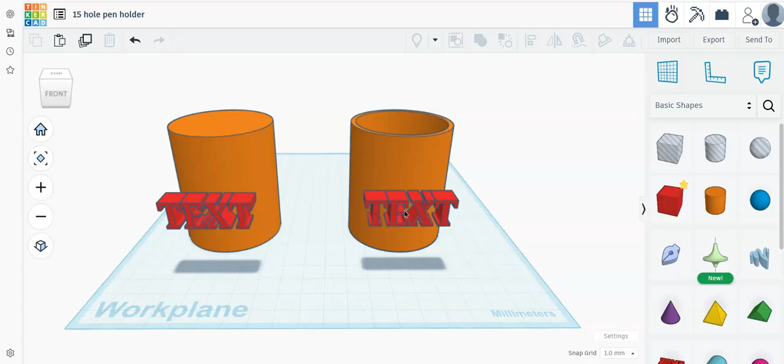In this video, I will show how to create curved text around curved objects like a hollow cylinder and a solid cylinder in preparation for 3D printing in two colors.

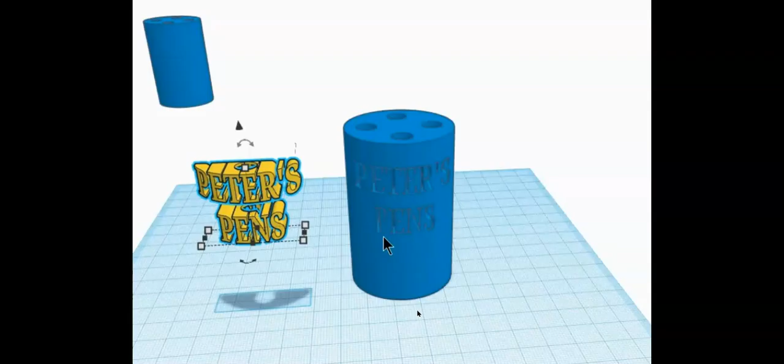In a previous video I made a couple of years ago, I showed how to make the curved letters, and that the cylinder itself had to have a hole that the letters would fit perfectly into. That all worked okay, but I've just discovered that making holes into the cylinder isn't really necessary, and this video shows how to do basically the same thing without that step. The technique for getting the text to curve around the surface of the cylinders is basically the same, but there's one case where you have to be careful of the difference between the two, which I'll get to.

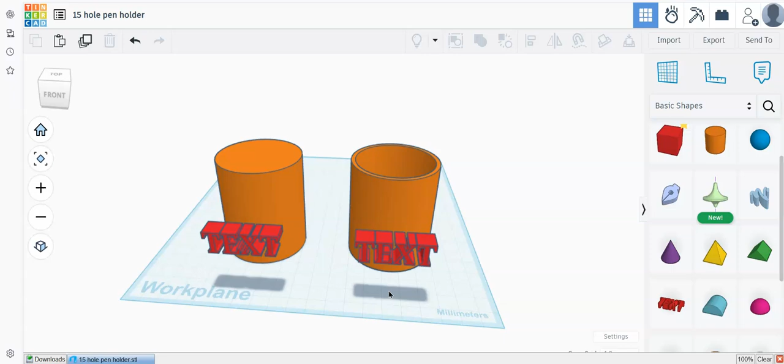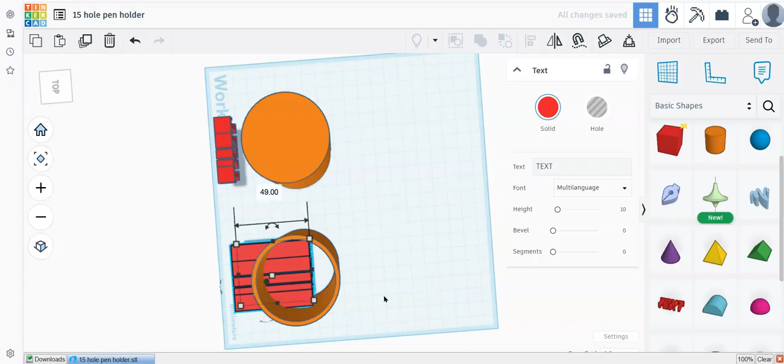Let's start with this one first. So let's bring the text here a little closer, and then grab this black handle and extend this into the cylinder. If we look from the top, it doesn't matter how far we go into it, just make sure the edge letters are within the wall. When the cutting process occurs, whether it's this far or this far doesn't matter, because it'll end up being the thickness of the wall.

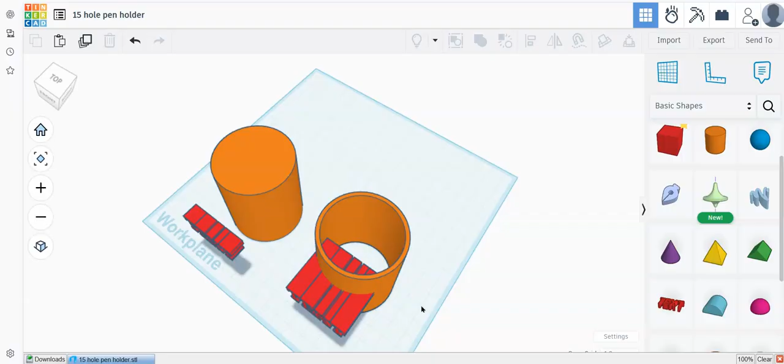So let's go through the technique here. First, before we forget, always duplicate this cylinder and use the right arrow key to go to the right, and use the arrow keys to make sure there's always an alignment. Having everything perfectly aligned is important, as we'll see later when we work in the slicer.

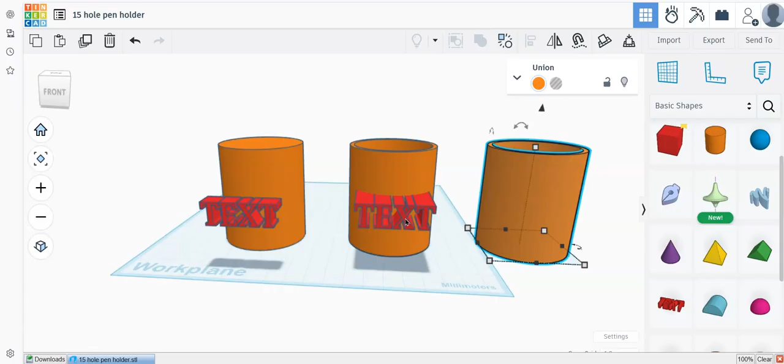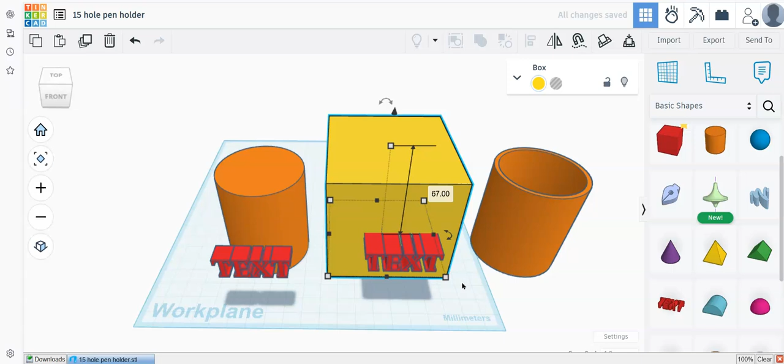So, coming back here, we're now going to bring out a box. I'll change it to yellow just for a contrasting color, and we're going to cover everything, just about, and raise this to cover everything, and the letters should protrude. It doesn't matter how much they protrude, as long as they come out a little bit.

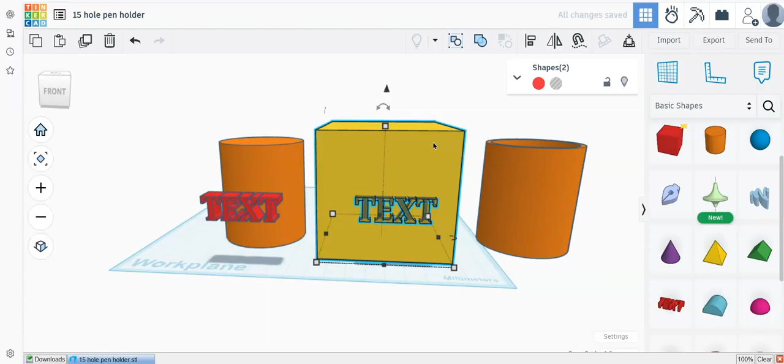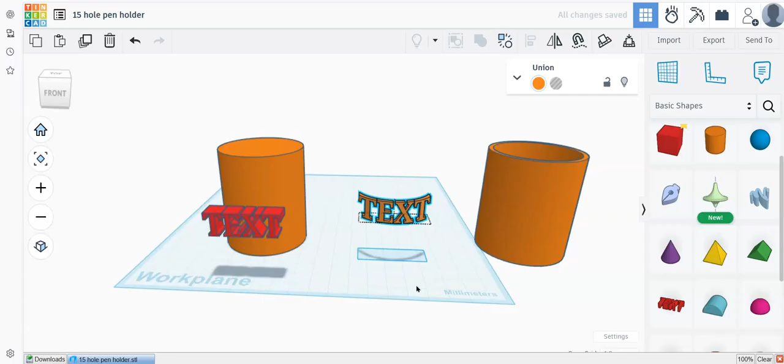So the first step is to click on the text and turn it into a hole. Holding the shift key down, click on the yellow box. We have two shapes now which we will combine. While they're still selected, turn everything into a hole, and now you can just grab these two shapes and combine them, and that will give us our curved letter. You can see now they are just the thickness of the cylinder.

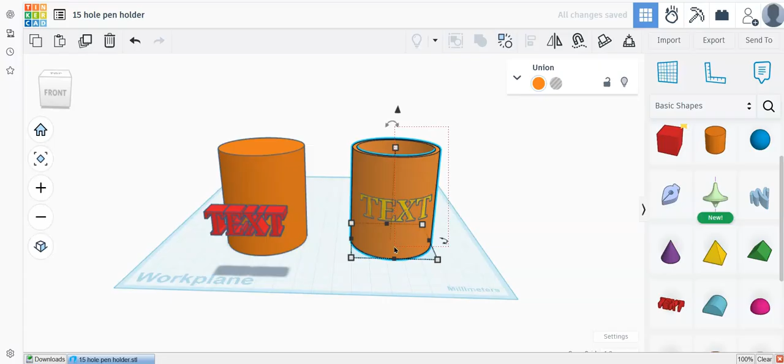So let's change the color here, say to yellow, and bring the cylinder over using the left arrow key, and align them. You can align them just like this by eye, or grab the two of them and use the align symbol here. You can see the grayed out means they're already aligned. So that's fine. Now we have two items here which will be exported and then eventually get into the slicer.

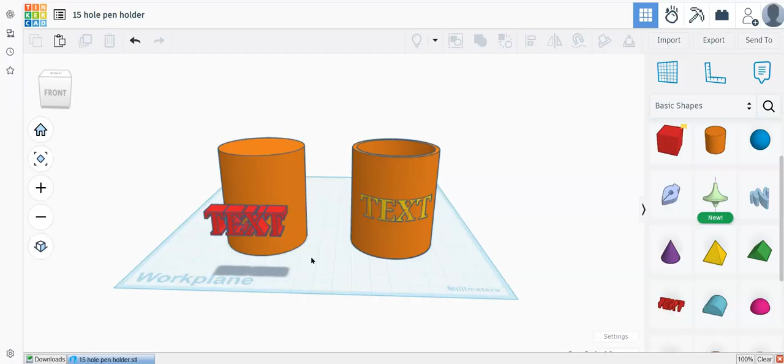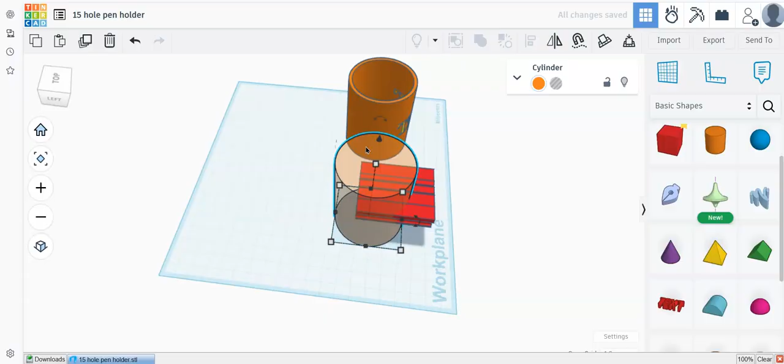I'll do that in a minute. Coming now to the solid cylinder, we'll do the same thing here. Bring this closer and then extend the text in here. Now, if we click on the cylinder and press T for transparent, we can see how far we're going in.

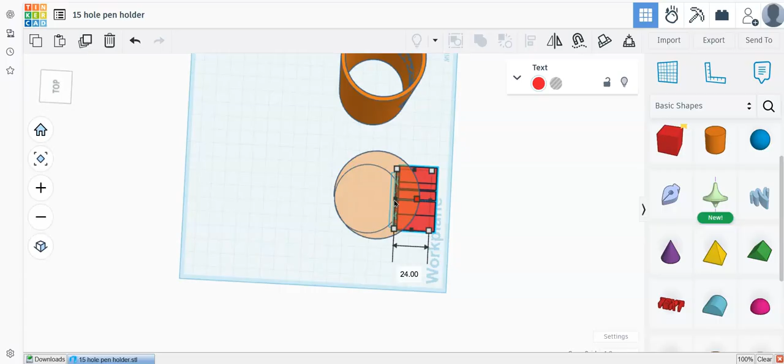In this case, it does make a difference how far we go in. Let me click on here, because if we go in far, the letters will be this thick. That will require a lot of filament and time to be printed, which we don't need. So we're going to withdraw this to the edge of the cylinder here. Make sure we don't go too far back, but we must be sure we clear at this end and this end, and this will minimize the thickness of the letters.

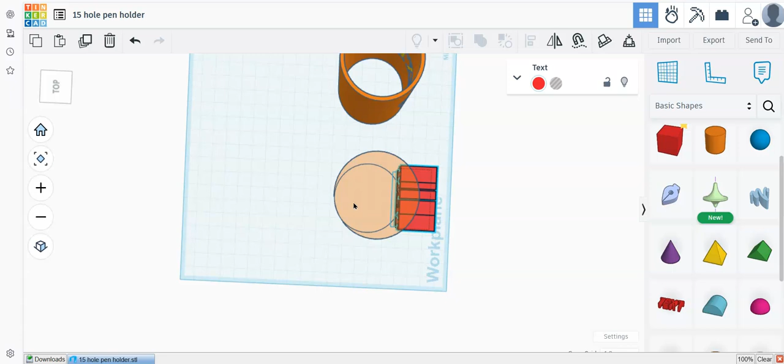Okay, so if we go back to T for transparency, now we'll do the same thing, and I'll do this quickly. You can see now the letters are thicker than they were in this case.

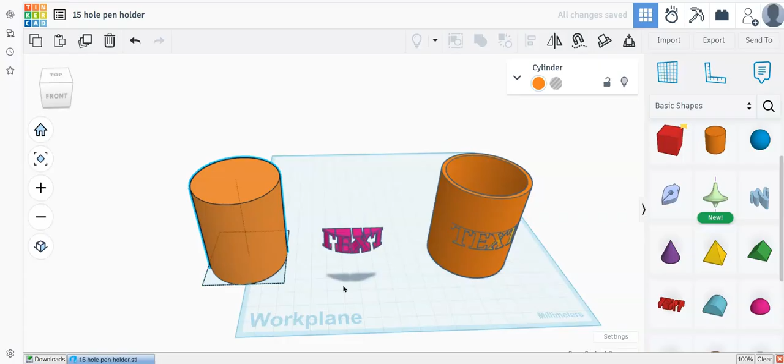Let's get a different color here, and now bring this over. Oh, actually notice I didn't go deep enough because the T is cut off. So this really has to be redone. I have to go further into the solid to make sure I got all the letters. So now we've got the full text shown here.

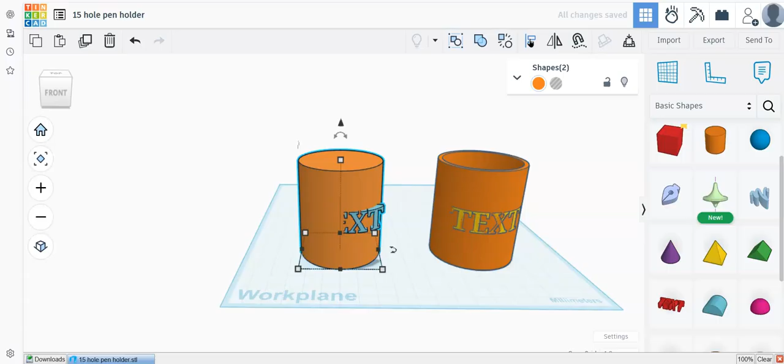Get them both, you can do it this way and click on Align. This is already done, okay, so that's it.

Transparent, and look at this. We can see that the letters go in this deep, and the printing will go into this deep, whereas over here it will just be flush on the inside of the wall.

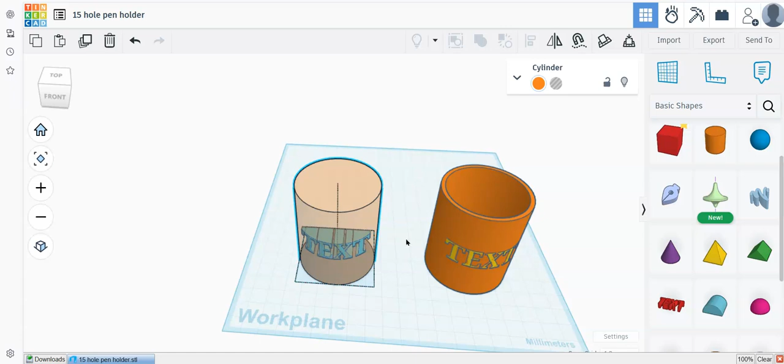Now we're ready for exporting. I'll just do it with the hollow cylinder, everything applies as well to the solid one. So click on Text, go to Export, and see the selected shape, which selected that one shape.

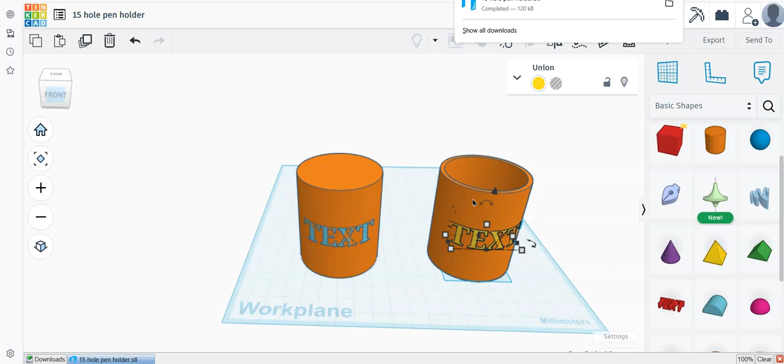This will be saved then either on your desktop or flash drive or wherever you like, and named appropriately, say text. Then click on the cylinder, export again, the selected shape, and that's done. And now we'll go into the slicer.

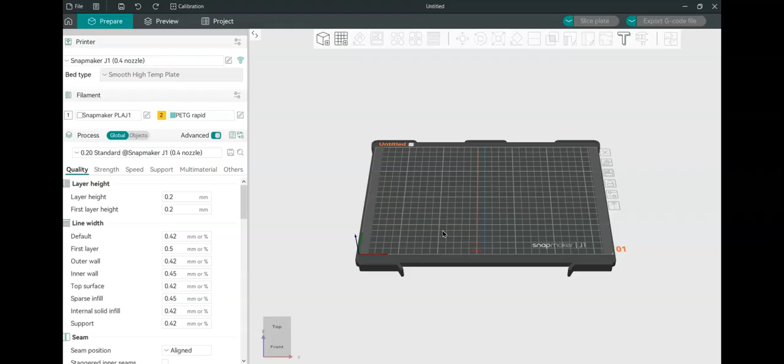Now I've opened my slicer. This is the Snapmaker Orca, and this will be the same procedure as with Orca Slicer and Prusa Slicer. So I will add first the hollow cylinder right here, and now right click on here and go to Add Part. Again, this works with just Orca and Prusa Slicer.

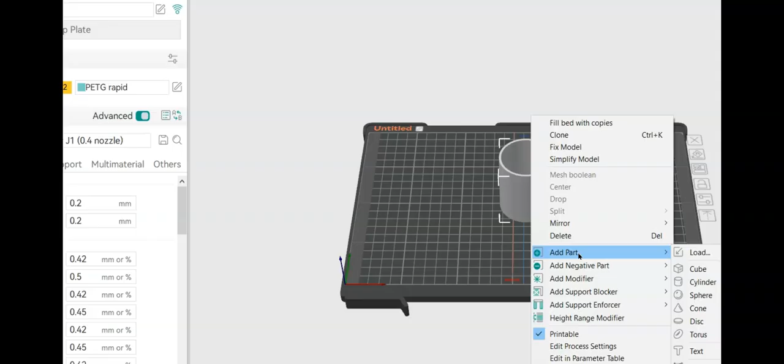Go to Load, and now we're going to look for the text. In order to see this, go to Objects, here's text, click on it twice.

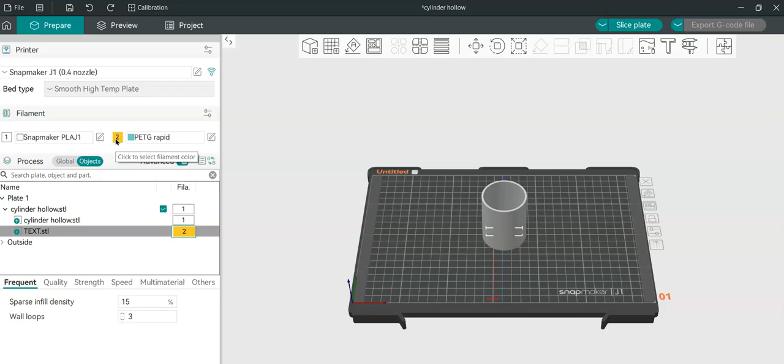This is the yellow, this is the second extruder, and it is perfectly aligned here because it was aligned correctly in Tinkercad. You'll recall I said to use the arrow keys left and right to keep everything in alignment, and it was for this reason, so that it lines up perfectly in the slicer.

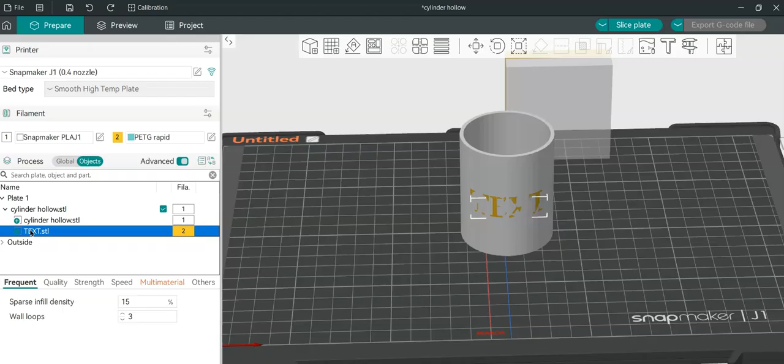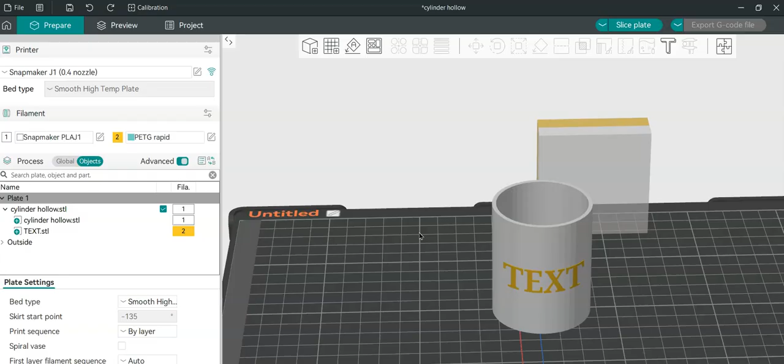If you want, you can click here on text, and if we look at it from the side, we can go up here and move it slightly. If you want it to jut out slightly, we can do it like that. So now it's ready for printing with any printer that has two extruders.

As an afterthought, let me show how this can be applied to making an ornament like this. I'll unhide these objects. So here is a snowflake - there are a couple of good videos on YouTube that show how you can make your own.

And this sphere, if I press T, you can see it's been 4 millimeters thick, the walls, and the rest is hollow.

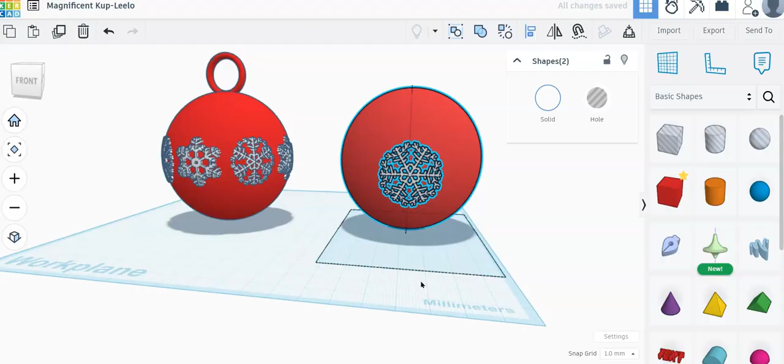So we take the snowflake, let's raise it up approximately, and select the sphere, align them in the middle here. And now, bring it a little bit, take the snowflake, and I'm going to make it around 10, make it thick by 10 millimeters or so.

And then bring it into it a little bit. We can extend it because it's hollow. Remember, it doesn't matter how far we go in as long as the edges go inside those walls.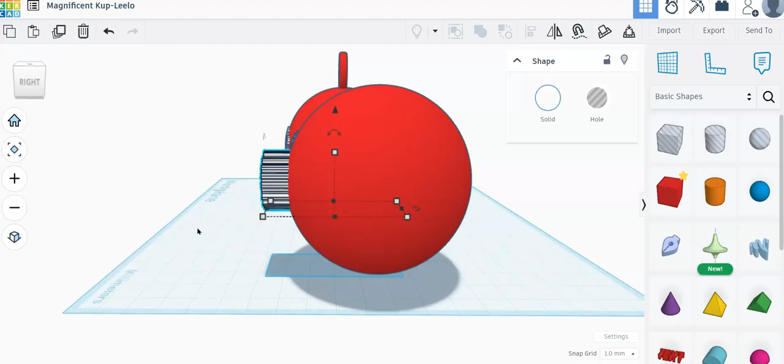So that's nice. We'll go back to the front. Again, duplicate, Control D, and move our sphere just using the arrow key to keep everything in alignment.

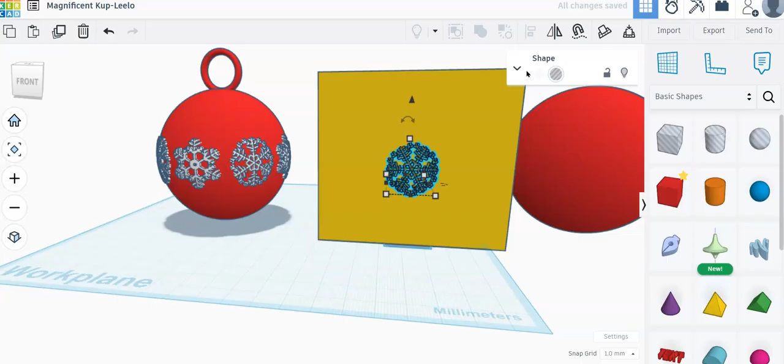And now we'll just use the same technique of curving the snowflake, bring out a box, combine, and here is our result, with just a slight curve to fit the sphere.

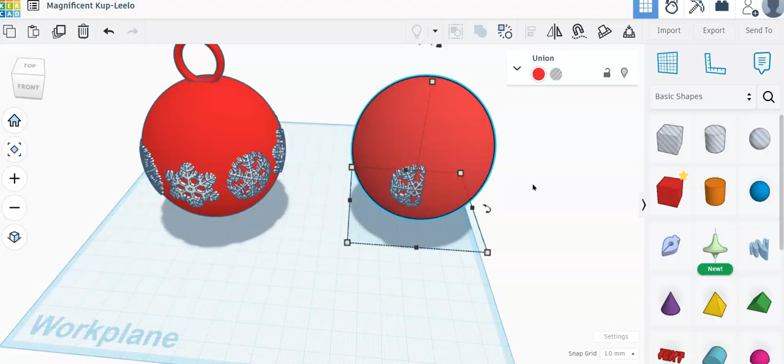I'll change the color to white and bring the sphere over, like that.

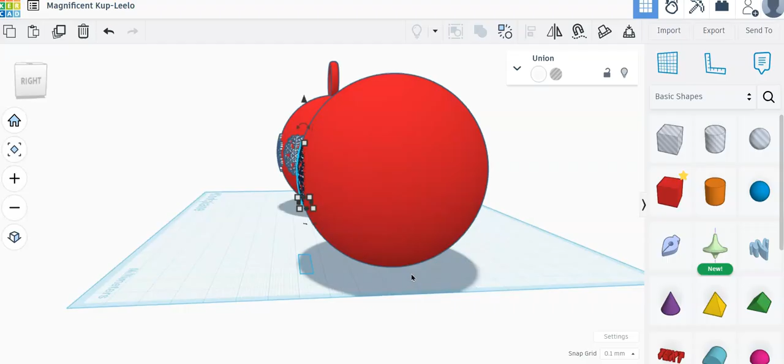Alright, now it is flush on the surface, so I will click on it and bring it out by a very small amount. Go down here, I change this to 0.1 and move it out 1 or 2, maybe 0.2, and it gives it a little pop out.

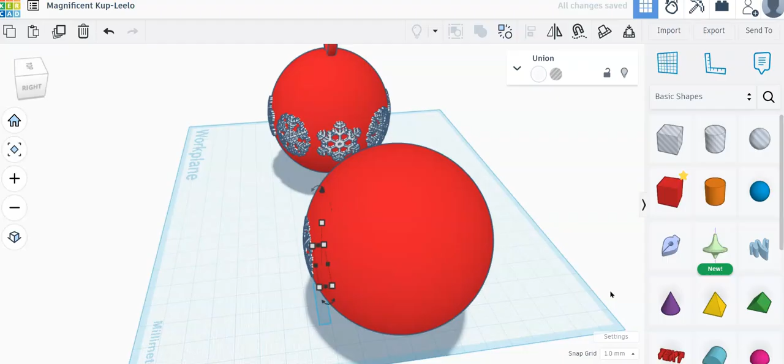I guess if I look over here, I've got it even more, so you can vary that as you wish. And then duplicate this and move it right to the back. Oh, let's go back, change this to 1, so it'll be more efficient bringing it out here.

Now when it gets out here, we need to flip it around, so we go to the mirror here and flip it in this direction, and there it is. Okay, so that's sticking out a little bit more. See, just play with how much you want to have it projected.

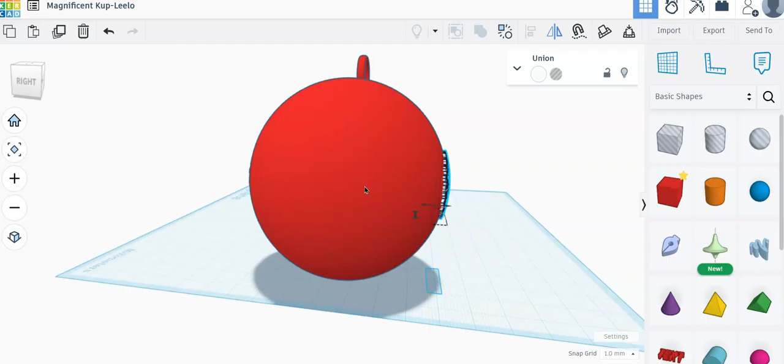Combine the two, turn them around, and you can bring in a second snowflake, and eventually add the top here, and then you'll get this nice ornament. I won't waste your time by going through all the procedure. You have all the techniques, and I guess that's it then.